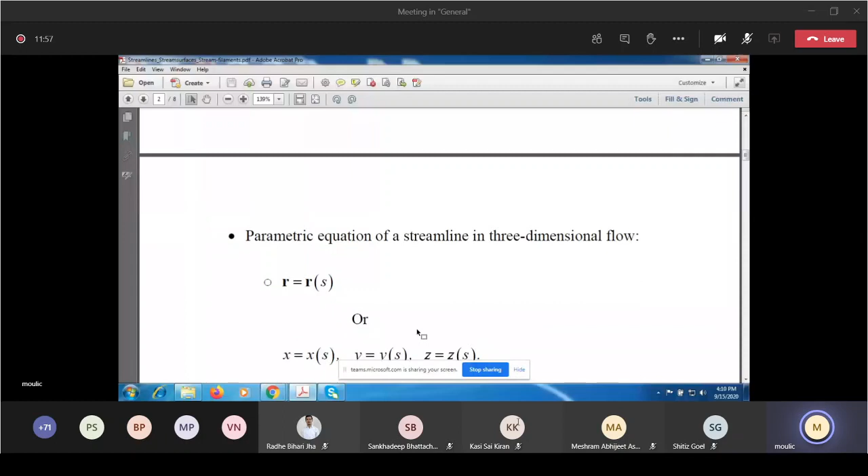Now, if you look at the parametric equation of the streamline for a 3-dimensional flow, the position vector r of a point on the streamline is a function of the arc length coordinate s. Equivalently, the x, y, and z coordinates are functions of this parameter s, the arc length. So the vector r denotes the position vector of a point on the streamline, and s is the arc length from some reference point along the same streamline.

So the vector form of the equation one can write as dr/ds equal to the velocity vector divided by its magnitude. If you divide the velocity vector by its magnitude, what you get is the unit vector in the direction of the velocity vector. And dr/ds is also a vector which is tangent to the curve defined by the equation r equal to r(s), and it has unit magnitude.

So if this arbitrary curve is a streamline, then you have dr/ds equal to v by v. This again is a vector equation which will have 3 components, which you can write as dx/ds equal to vx by v, dy/ds equal to vy by v, and dz/ds equal to vz by the magnitude of the velocity.

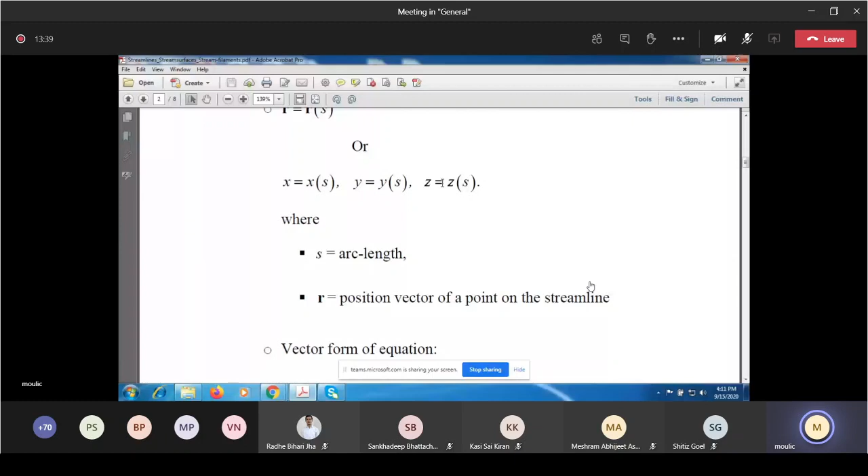So you have 3 scalar equations, which may be coupled equations, for the x, y, and z components of a point on the streamline. Now, in many cases, we will be dealing with 2-dimensional flows, so we will not be interested in the z component. So z is a constant in that case.

So here we will have just x and y being functions of s, and you have 2 equations: dx/ds equal to the x component of velocity by v, and dy/ds equal to the y component of velocity by the magnitude. Now if I take this second equation and divide it by the first equation, then the ds and the capital V will cancel out, and you simply get dy/dx equal to vy by vx.

So the slope of the curve in the xy plane, if the curve is a streamline, is equal to the ratio of the y component of velocity to the x component of velocity. These can be functions of x, y, and t for a 2-dimensional flow. If it's steady, the velocity components will not depend on time, but if it's unsteady, they will depend on time as well as the 2 spatial coordinates. So since the flow is 2-dimensional, there is no z dependency.

Now, let me ask you a question. We'll need this concept in this course. Can 2 streamlines in a flow field intersect at a point?

No, sir. No, sir. No, sir.

So what is the reason why? It can't have 2 different velocities at the same point. It cannot have 2 tangents at the same point. So if the velocity vector is non-zero, and if they intersect, then there will be 2 tangents, right?

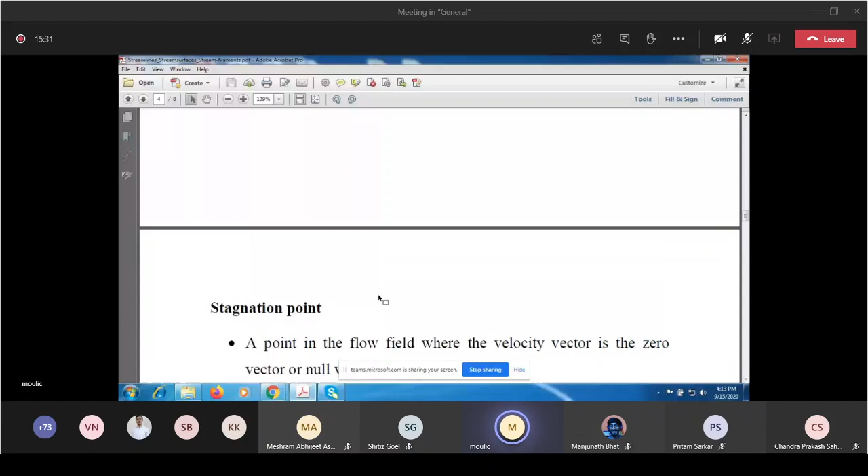But in your second year course, you must have come across this term stagnation point. Do you recall what is a stagnation point? A stagnation point is a point in the flow field where the velocity vector is the zero vector or the null vector. So it is a point where all components of the fluid velocity are zero.

Now suppose I have a stagnation point with coordinates x subscript s, y subscript s, and z subscript s. I'm putting this subscript s to denote the stagnation point. Then by definition, the velocity vector at this point will be zero for all instants of time. Of course, if the flow is steady, there will be no time dependence, but even if it's unsteady, at each instant of time, it will be zero.

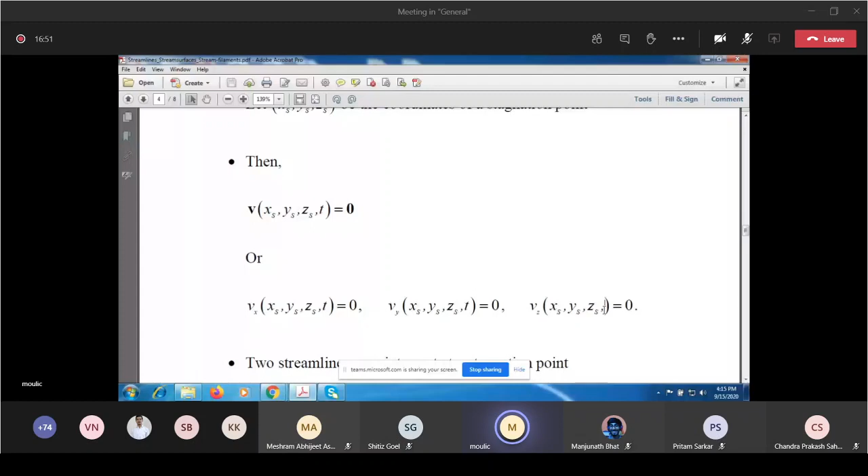So this again is a vector equation. It is equivalent to three scalar equations, that is, the x, y, and z components of the velocity at this point must be zero. And I have noticed a typo here, a typographical error. I missed the t somewhere. I'll iron out these small typographical errors before I upload it. There must be a t here also.

Now the question is, suppose Vx and Vy are zero. Then streamlines might intersect because the tangent is not defined. So consider a two-dimensional flow field: you have the velocity vector having two components, Vx and Vy, and the Vz component is identically zero.

As we have seen, the equation of the streamline is dy/dx equal to Vy by Vx. If you can solve this equation, you will get y as a function of x, which will be the equation of the streamline. Now, if both Vx and Vy are zero, then the right-hand side of this equation is of the form 0 by 0, so it is an indeterminate form.

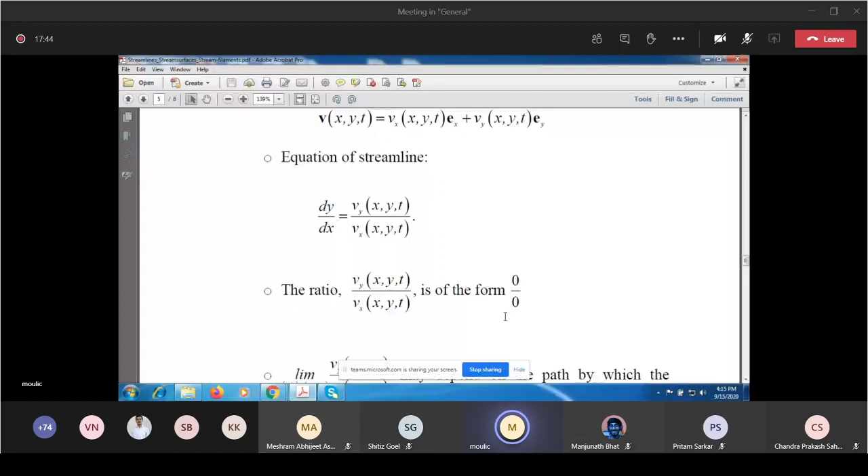So you can try to find the limit of Vy by Vx. To be more precise, Vy, which is a function of x, y, and t, divided by Vx, which is another function of x, y, and t, as x and y approach xs and ys.

But you can approach that point in the plane from different directions, and this limit might depend on the path by which the stagnation point is approached. So sometimes, in many cases, two values of this limit might exist. So how would you find these limits?

Well, you can expand Vx and Vy in a Taylor series expansion about xs, ys, or you can use the L'Hopital rule. And you may find that there are two finite values of the limit, depending on how you are approaching this point. So in that case, two streamlines may intersect at the stagnation point.

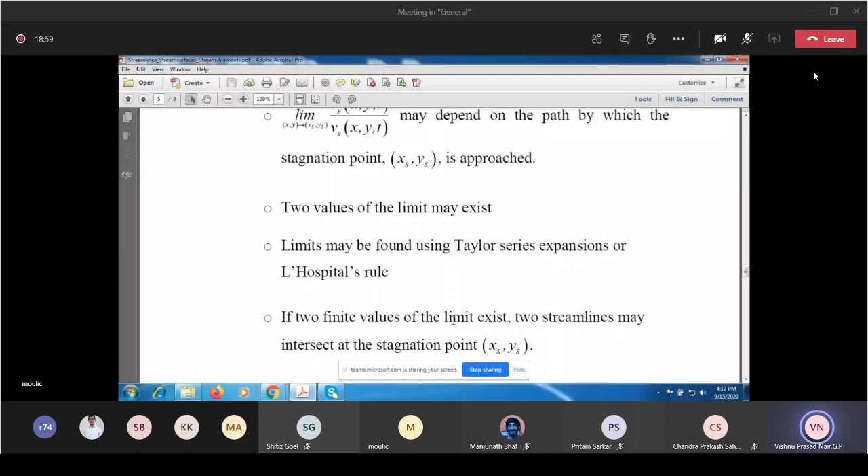Is it clear? Sir, but here, could we claim that the streamlines will end on that stagnation point? That is, they can't continue after that. After that, it would be some other streamline. So it would be like many streamlines coming to a point.

If two streamlines intersect at a point, then the velocity vector there must be zero. Otherwise, there will be two tangents. And if two streamlines are intersecting like at this stagnation point, those streamlines cannot extend beyond that, right?

Streamlines cannot intersect if the velocity is non-zero. Yeah, that is true. But suppose that we have a stagnation point and two streamlines are coming towards that stagnation point. Then my question is, can they extend beyond that stagnation point? Beyond that stagnation point, those streamlines are different, right?

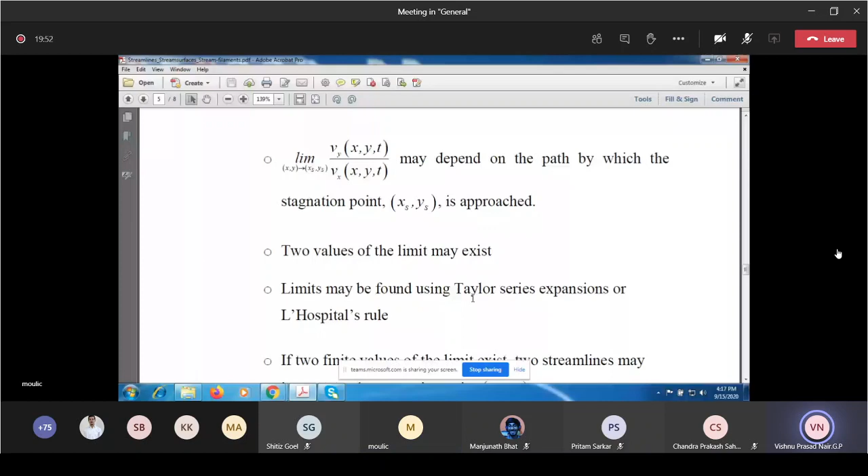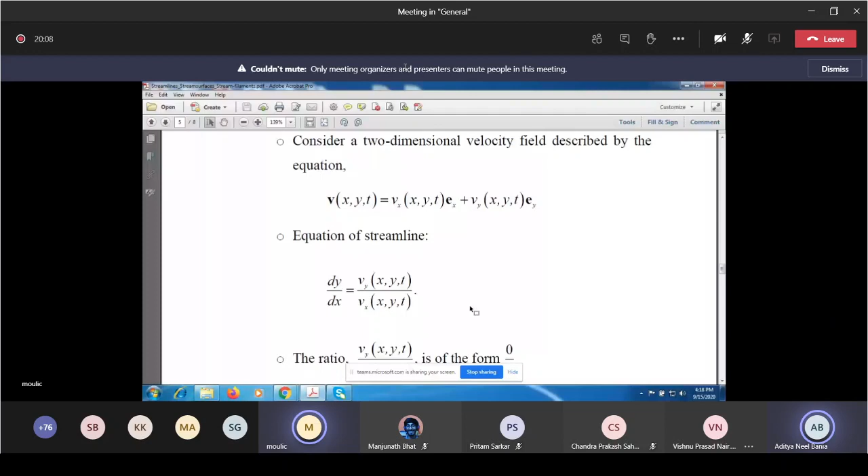So what I'm trying to say is, I asked you this question: can two streamlines intersect at a point? And the immediate answer was they cannot, because then there'll be two tangents. Right? Yes, sir.

Now, but the tangents are undefined if the velocity vector is zero. You can define a tangent to the velocity vector only if it is non-zero, that is, the magnitude is non-zero.

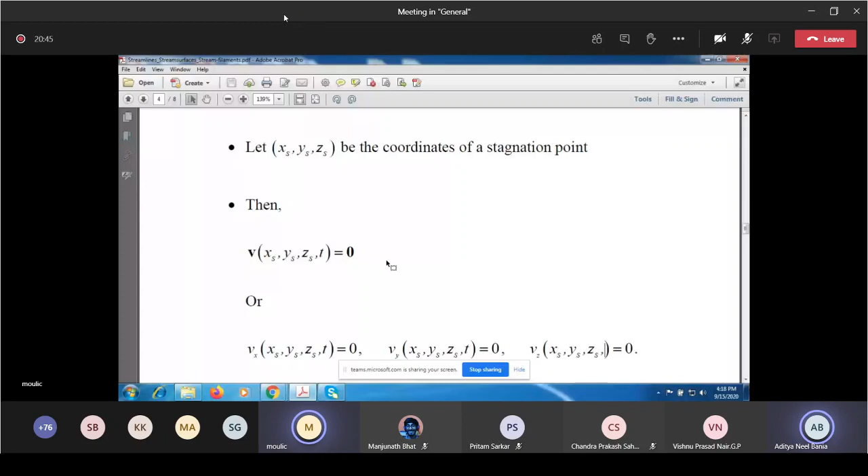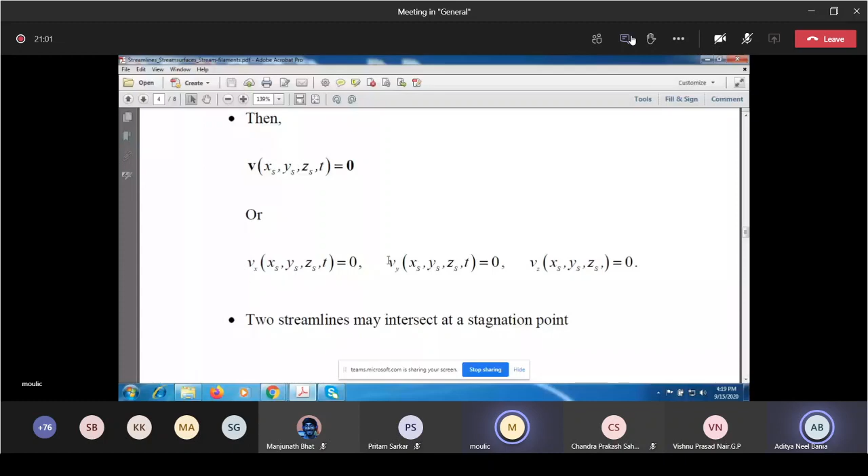So when the magnitude of the velocity is zero, of course not all points will be stagnation points. For example, if you look at viscous flow along a solid plate, you can argue that velocity is zero at all points. But streamlines are not intersecting. So those are not stagnation points.

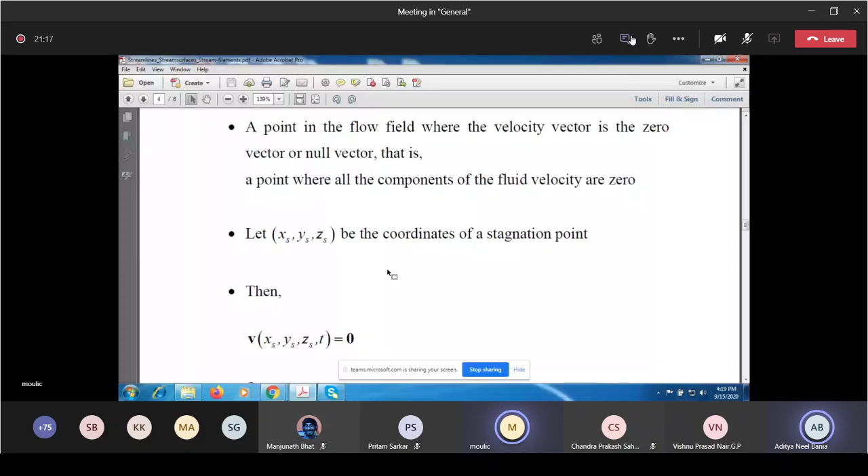So the concept of stagnation point is best understood in the context of inviscid flows. Imagine that the fluid is an ideal fluid. If it's an ideal fluid, it will slip along the wall, so then all components of velocity will not be zero over there. All components of velocity would be zero there, right? No, will not be zero. Correct. Only one component, say the Z component or something, will be zero.

Even if one component of velocity is not zero, you can define the tangent. In that case, two streamlines cannot intersect. So what I'm trying to say is, two streamlines, if they intersect, that is possible only if the velocity vector is zero.

Now, I can give you an analogy. You must have studied, done experiments on magnetism in the physics lab, either here in IIT or maybe in your school days. Have you drawn magnetic lines of force using a compass and a drawing sheet and a magnet? Yes, sir, all sir. So you know the concept of a neutral point in a magnetic field.

So the magnetic line of force is something similar to a streamline. It is a curve in space which is everywhere tangent to the magnetic force at that point. So you place a compass, a small compass with a small needle, and the north pole and south pole of the compass will align in a direction which is tangent to that curve.

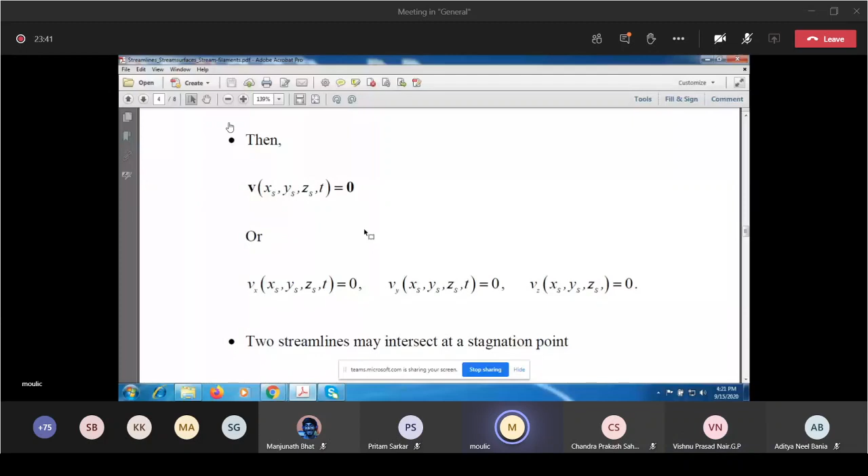But you could have points where the velocity components are zero, but it is not a stagnation point because there is no intersection of streamlines.

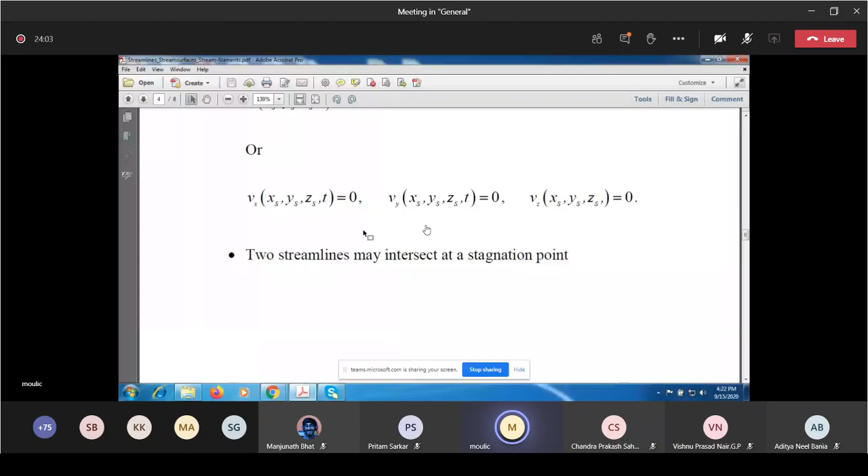So this is a very important concept, and in this course you'll find that we will not be solving partial differential equations. Unlike other courses on fluid mechanics, we'll be using simple models which are one-dimensional, but if you want to understand how those mathematical formulas are coming up, then these concepts become very important.

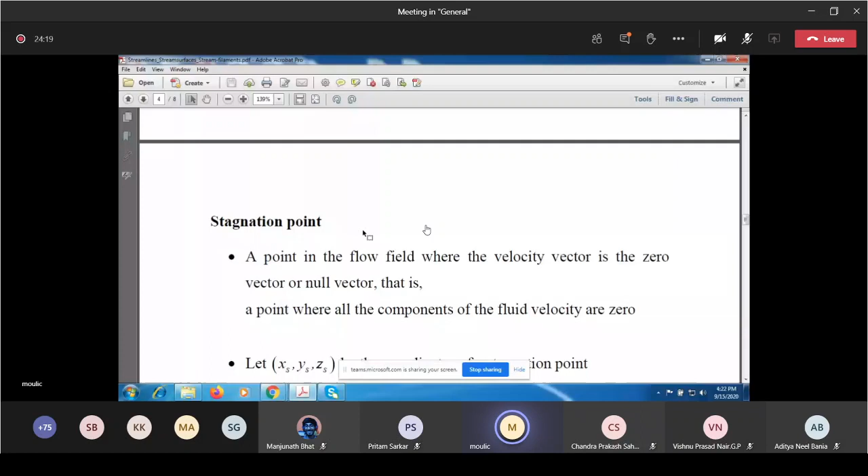So to identify a stagnation point, you have to see if streamlines are intersecting. And if it's an inviscid flow, if you look at the neighborhood of the stagnation point, where would the maximum pressure occur? What do you think?

If you apply Bernoulli's equation, that pressure plus kinetic energy - maximum pressure will be at the stagnation point, because the sum of pressure, kinetic energy, and potential energy is conserved. So if you are in the vicinity of a point, the change in potential energy is negligible. So the point where the kinetic energy is minimum will have maximum pressure because the sum is constant.

So a stagnation point will locally have the largest pressure. So if you're measuring pressures as an engineer at different points along a solid surface, if you find a point where the pressure is maximum, it's possible that another streamline must have come from another direction and hit that solid wall at that point.

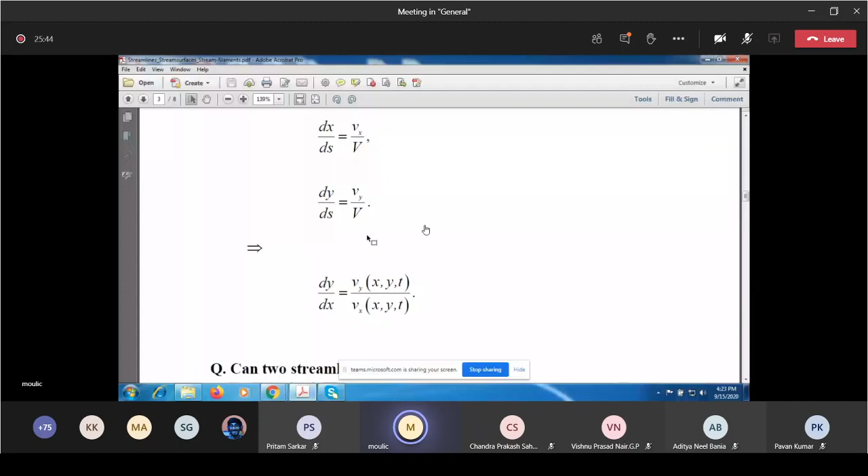So what I'm trying to say is that you can have two tangents, that means two values of the slope. If there are two tangents, dy/dx has two values, and that cannot happen if vx and vy are non-zero.

But if both vx and vy are 0, it is of the form 0 by 0. So of course, the limit might exist, so there may be a tangent, but the limit might be dependent on the path by which the stagnation point is approached. In which case, along two paths, you may have two tangents.

And in fact, you can show that if the flow is irrotational, the angle between the two directions is 90 degrees. But in viscous flow, it may not be 90 degrees.

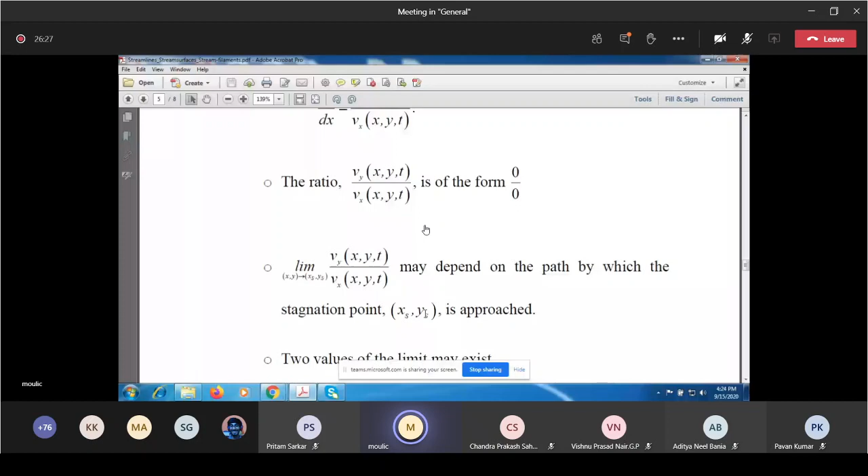Now let us look at steady flow versus unsteady flow. We'll be using Bernoulli's equation in this course, but as I said yesterday, Bernoulli's equation is valid only when the flow is steady.

But sometimes you may have a case where the flow is steady in a translating frame of reference, but unsteady in a stationary frame of reference. So you have to figure out whether the flow is steady or not before you apply Bernoulli's equation. Now, how would you do that?

Well, if you know the velocity field, you can see whether it varies with time. But another geometric way is to look at the streamline pattern.

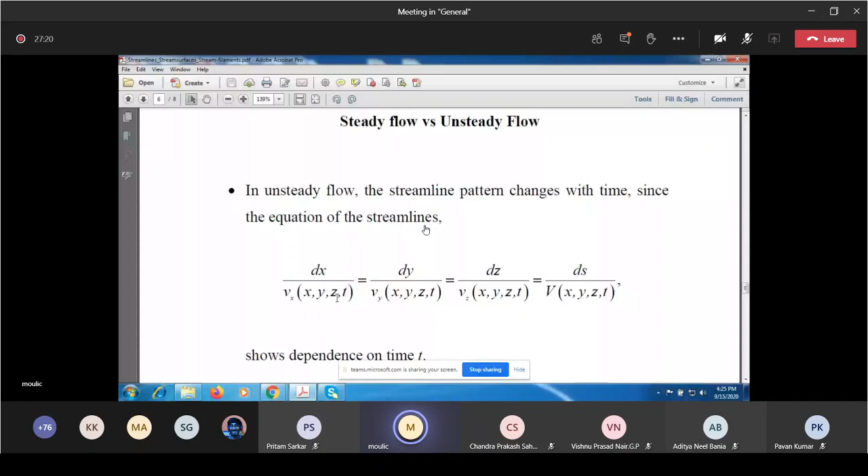Now, the equation of the streamline I've written down here again - I've written it in my first slide, but here I've written x, y, z, and t as functions. So as you can see, if the velocity components depend on time, then if you integrate this equation to find the equation of the streamline, it will have some time dependence. That means the streamline pattern will change with time if the flow is unsteady.

So you might do a flow visualization experiment in the lab, and you can take photographs of the streamline pattern at different instants of time. If you find that the pattern is changing with time, that means the flow is unsteady. So this is a physical way of figuring out whether the flow is unsteady.

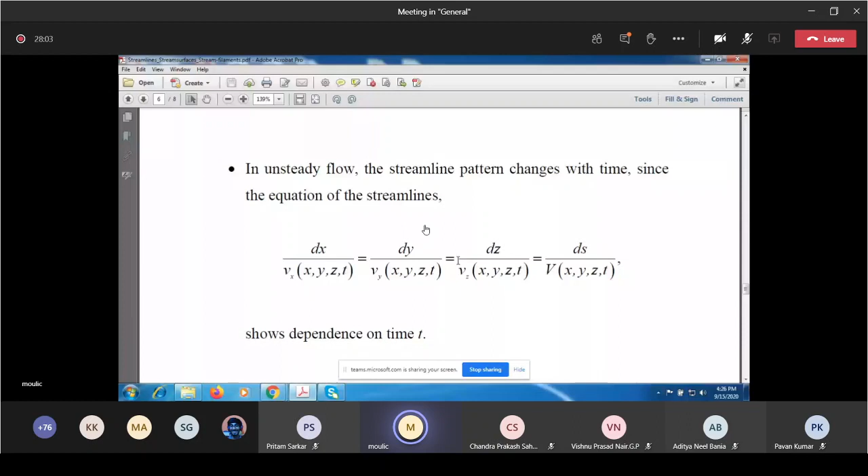Now suppose the flow is steady, then I'll write the same equation here, but I will not write the time dependence in the velocity components. Neither of the three velocity components depend on time, and therefore the magnitude v is also independent of time.

So if I integrate this equation, you'll get a curve which is fixed in space. There will be no time dependence, it will not move with time. So in steady flow, the streamline pattern is fixed in space. So these concepts you can use to figure out whether the flow is steady or unsteady.

So we'll come back later on to the Pelton turbine, and there you'll see that when the bucket is translating, with reference to the translating frame of reference, the streamline pattern will be fixed in space.

But if you have an observer on the ground, you'll see the streamline pattern moving or translating in space. So the observer on the ground will see a flow which is unsteady. But an observer attached to the translating frame will see a flow which is steady.

So we'll see that you can apply Bernoulli's equation in the translating frame, but that velocity which you use, v squared, has to be the relative velocity. So these are important concepts. That is why I'm reviewing all this.

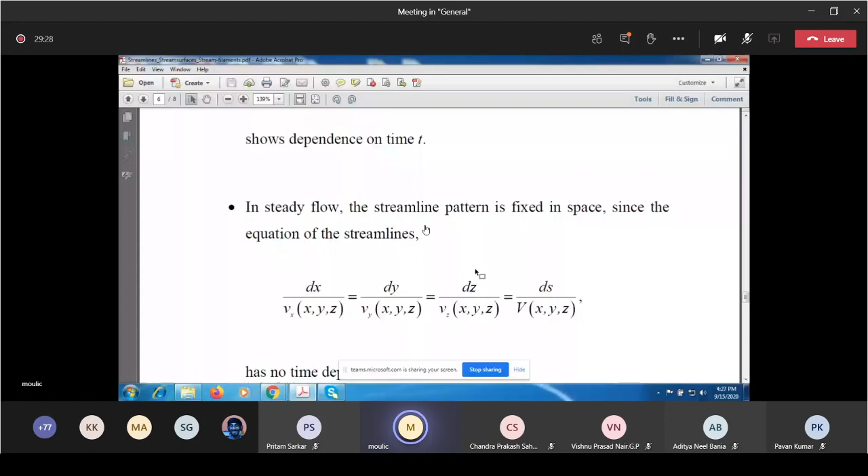Okay, now let us look at the term which is referred to as stream surface. This is a surface which consists of streamlines. Now, as you know, velocity vectors are tangent to the streamlines, so the component of velocity normal to a streamline is 0. So no fluid can cross a stream surface.

So if we look at the volume flow rate crossing any part of the stream surface, no matter where you are on the stream surface, the volume flow rate will be 0. If the surface is not a stream surface, you could have fluid crossing from one side to the other on some part, and in the opposite direction on other parts. So there may be a positive volume flow rate and a negative volume flow rate, and the net might be 0. But here, if it's a stream surface, you can take any portion of it and there'll be no fluid crossing it, so the volume flow rate will be 0.

Now, if you have an impermeable solid surface, you know that it is a stream surface. Why? Because if it's impermeable, the fluid cannot seep through.

Now, if you have a porous surface with small holes, fluid can cross the surface from one side to the other. You may also have a membrane which is permeable, which will allow the fluid to go through. In that case, the porous solid surface will not be a stream surface, and the permeable membrane will also not be a stream surface. But if you have a membrane which is impermeable, then no fluid can cross that membrane, and you can identify it as a stream surface.

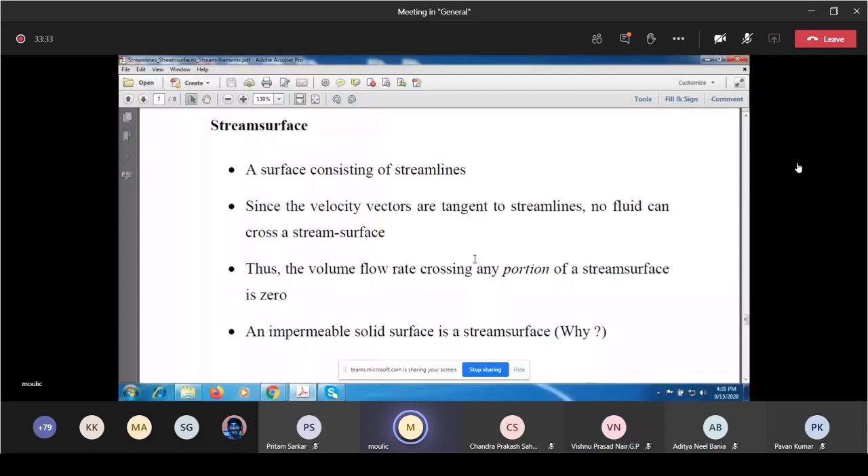Okay, now there's another term which you might have read before. It is called stream tube. This is nothing but a collection or bundle of neighboring streamlines which are passing through a small closed curve, and they form an imaginary passage or conduit through which fluid flows. And the cross-sectional area of this conduit may not be constant, so it may be kind of a wavy, undulating surface.

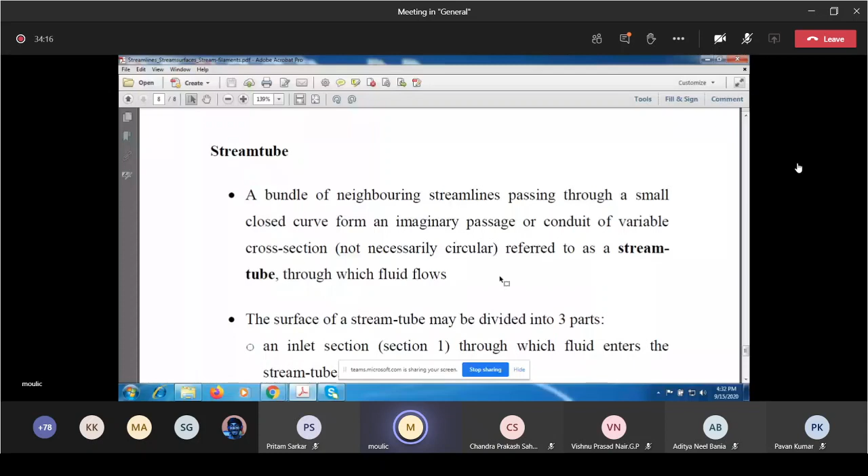So the surface of a stream tube will have 3 parts: an inlet section through which fluid will enter the stream tube, an outlet section through which fluid will leave the stream tube, and a curved lateral surface connecting the two ends.

So stream tubes, stream surfaces, stream lines, these are all imaginary lines. It's not a tube with a solid wall or anything like that. So imagine that you have a conduit through which fluid enters and fluid leaves. We are referring to the inlet section as section 1 and the outlet section as section 2. And the lateral surface is a stream surface, so no fluid will cross it.

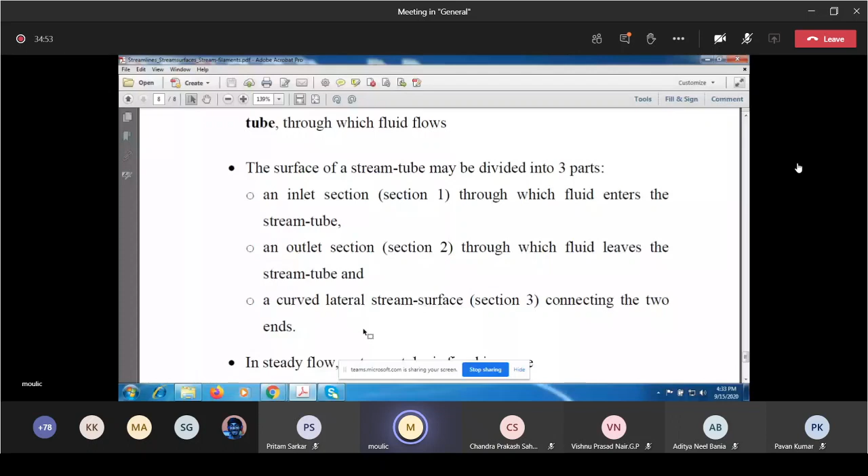Now, if the flow is steady, the stream tube will be fixed in space. And if the flow is unsteady, then the stream tube will move.

Now, are you able to hear me? Yes, sir. Yes, sir. There is a power cut here, so I thought there may be some problems. Okay.

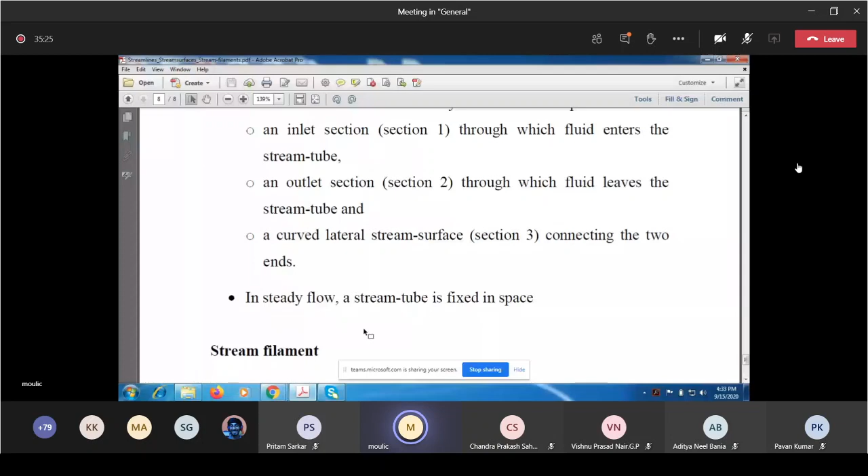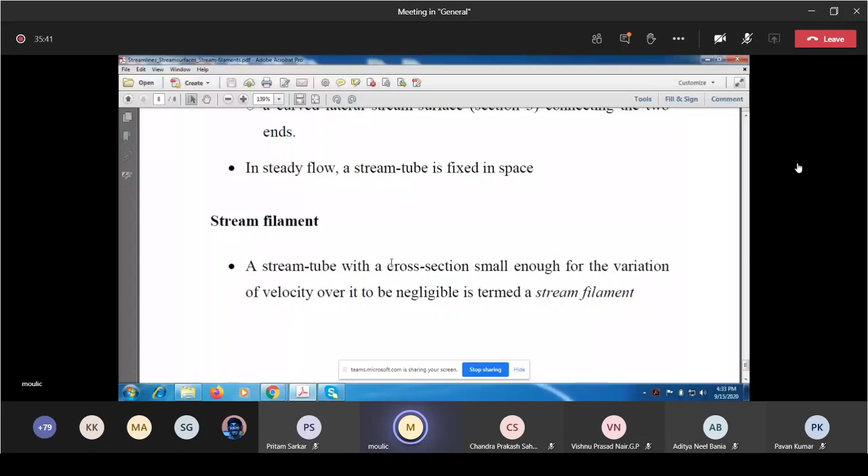Okay, all right, let us look at what is a stream filament. If you have a stream tube with a cross section which is very small, so small that you can neglect the variation of velocity over it, then you can call it a stream filament. So you can think of a stream filament as a stream tube with infinitesimally small cross section. It's a collection of streamlines.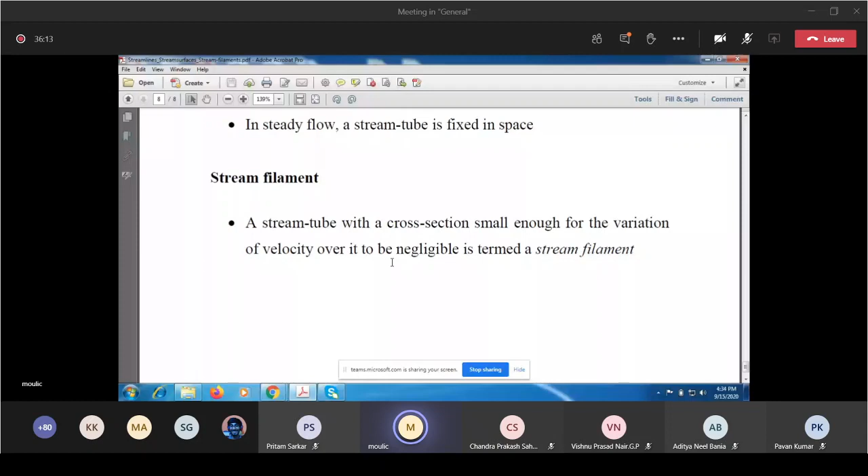Now I'll close this document and I'll go back to the first law of thermodynamics, which we discussed last time, and talk about it in the context of stream tubes and stream filaments.

Okay, so I've opened the document which I was discussing last time, and here we were applying global. Sir, you need to reshare the document. Oh, okay, okay, sorry. Thank you.

Okay, so let us look at what I was calling the global balance of total energy, or the first law of thermodynamics as applied to an open system or control volume.

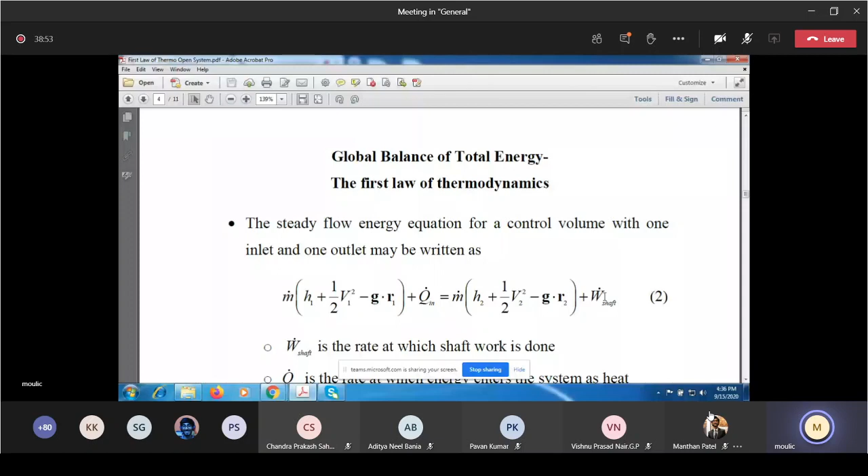Now we can apply this. You can take the control volume to be a stream tube. In that case, this Q dot in will be the heat transfer between the fluid which is inside the stream tube and the surrounding fluid which is outside the stream tube. So if Q dot in is positive, then heat will flow from the fluid surrounding the stream tube into the fluid which is inside the stream tube.

And if it's negative, then the energy in the form of heat will be flowing from the fluid which is inside the stream tube to the surrounding fluid.

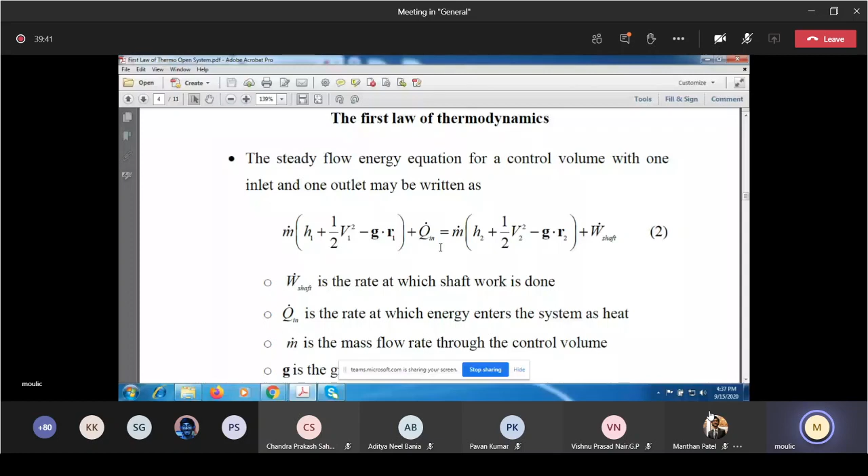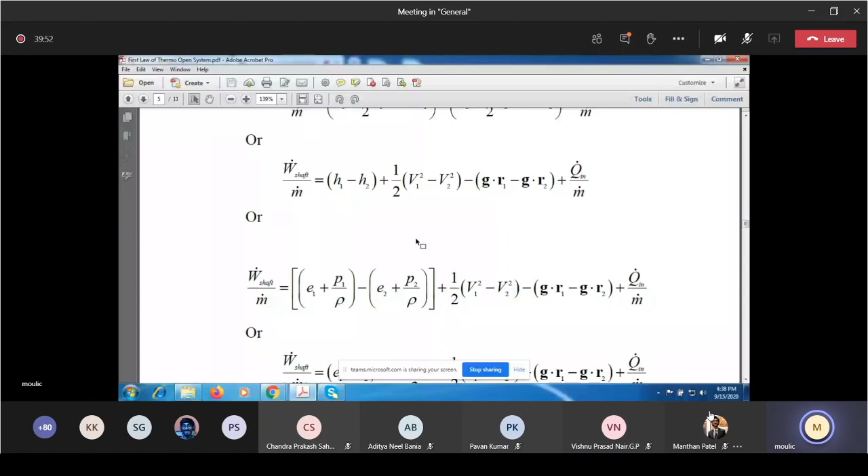Now this equation we rewrote in terms of the internal energy and the flow work PV. I'll just refresh your memory. We expressed it in the form where you had kept the shaft work per unit mass flow rate on the left hand side. So if you look at equation 3, the left hand side is the rate at which shaft work is done divided by the mass flow rate. And the right hand side had P1 minus P2 by rho.

So this is the contribution to the work because of the reduction in the pressure from inlet to outlet. And the second term is the contribution to the work due to the decrease in the kinetic energy of the fluid. So when the pressure and the kinetic energy of the fluid decrease, you extract work from the fluid. And if you're adding some work to it, then these terms will be negative, so the pressure might increase and the kinetic energy might increase. The third term is the change in the gravitational potential energy, that is usually negligible.

And you have this term over here, which is E1 minus E2 plus Q dot in by m dot. So what I'm trying to emphasize is, if 1 and 2 are the inlet and outlet of a stream tube, then this Q dot in here is the heat that is coming into the fluid inside the stream tube from the surrounding fluid. And if Q dot in is negative, then energy in the form of heat is being transferred from the fluid which is inside the stream tube to the surrounding fluid. It need not be a solid wall.

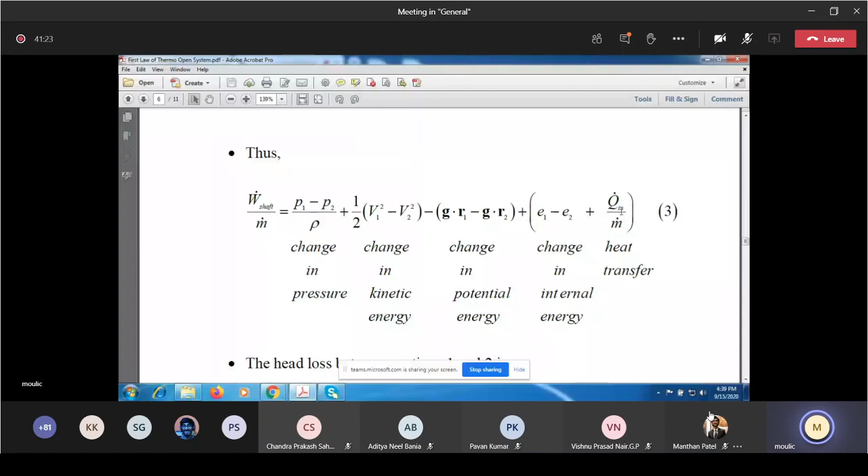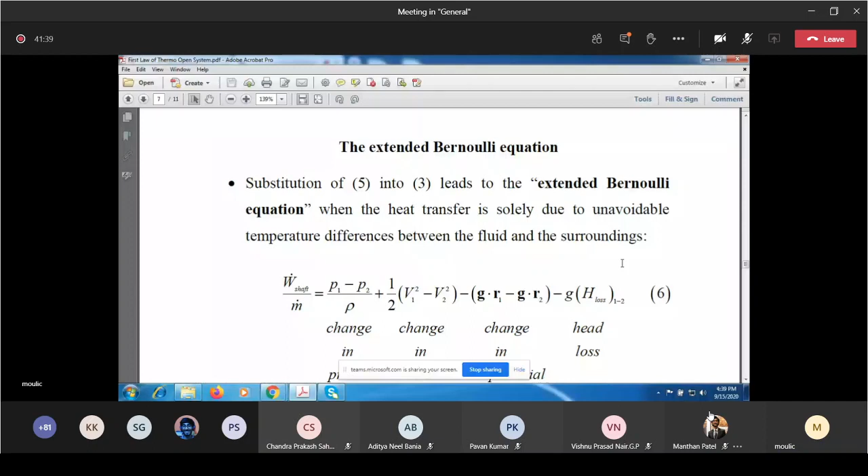So if you go down over here and look at this head loss term, we have defined it as 1 upon g times E2 minus E1 minus Q dot in by m dot. I want to emphasize that g is there just to get the terms on the right hand side in units of length, or meters if you're using SI units.

So you see that the head loss here is E2 minus E1, which is the increase in internal energy, specific internal energy, as the fluid moves from the inlet to the outlet. And minus Q dot in will represent the heat that is transferred from the fluid inside the filament to the fluid which is outside. So you can apply this to a stream tube or a stream filament.

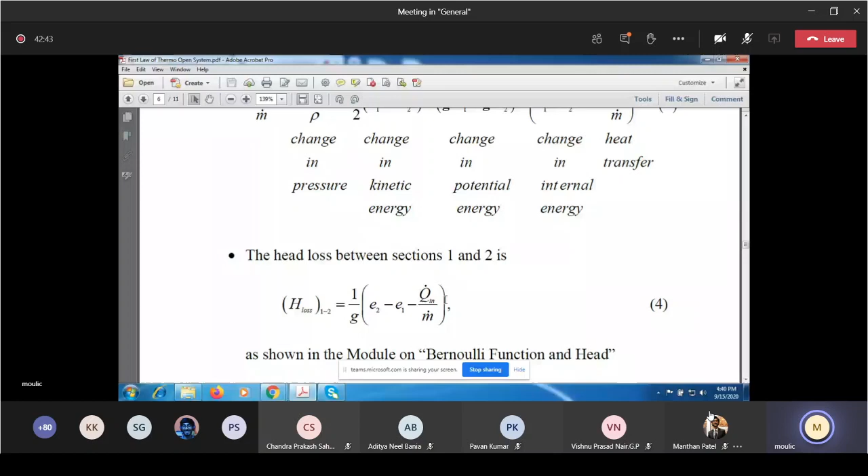So minus Q dot in is the heat which is flowing out, because plus Q dot in is the heat which is flowing in. And this heat transfer is from one part of the fluid to another part of the fluid. So by using the concept of streamline, stream tube, and stream filament, you can explain this energy conversion process.

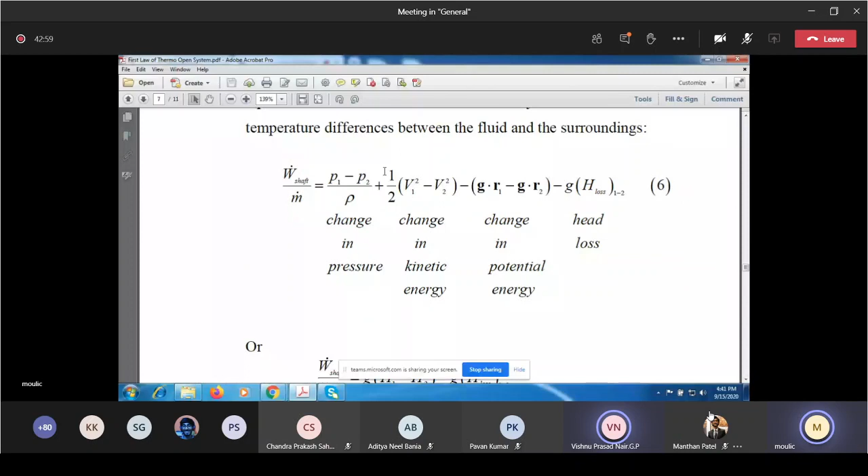Sir, I have a doubt. Stream surfaces can intersect, right? Yes. They could intersect along a common streamline, I guess. Yeah, it could. Suppose you have a flow field and there are two solid surfaces which are intersecting, then two stream surfaces are intersecting. That's possible.

What, like? Because a solid surface, if it's impermeable, if both are impermeable. Exactly, like a T-bend or something. Yes, but if you don't have solid surfaces, then only streamlines will intersect. Usually all the neighboring streamlines may not intersect. Streamlines can never intersect if you don't have solid surfaces. If you have a region of fluid with no solid surfaces, then only curves can intersect — tubes will not intersect.

So suppose you have a fluid which is at rest, then the velocity at each and every point is 0. You can't call them stagnation points — it's a static fluid. We are talking about special points in a flowing fluid. So in the flow field of a moving fluid, you may have certain points where the velocity vector is 0 and streamlines may be crossing.

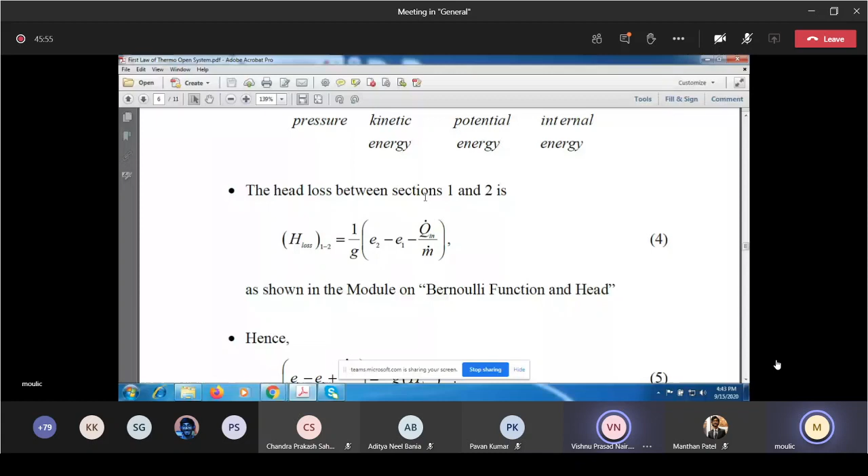So associated with that, there's one more doubt arising also. Streamlines intersect at the stagnation points, right? Then for an inviscid flow, the Bernoulli function should be the same along those streamlines, right? Yeah, but if you move from one streamline to the next, the Bernoulli function might change, if the flow is rotational, that is, the vorticity is non-zero, despite them intersecting at a stagnation point.

Oh, you're talking about a case where they're intersecting. Yeah, so then the Bernoulli function will be the same, because one point is common to them. If they're intersecting, then the Bernoulli function will have the same value on both the streamlines, provided the other conditions are satisfied - that is, the flow is steady, density is constant, and the force field is conservative.

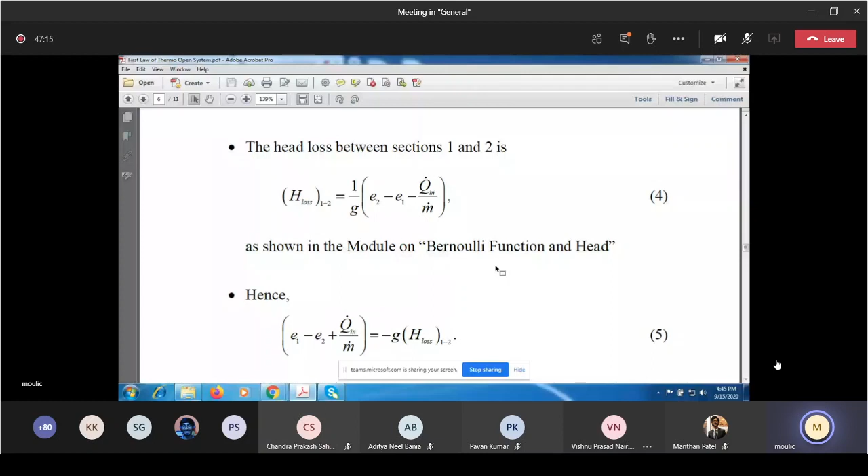Rotational or irrotational flow won't matter there, right? No, ah, yes. See, okay, let me go back over here. That is in another document, so I'll stop sharing this and open that one.

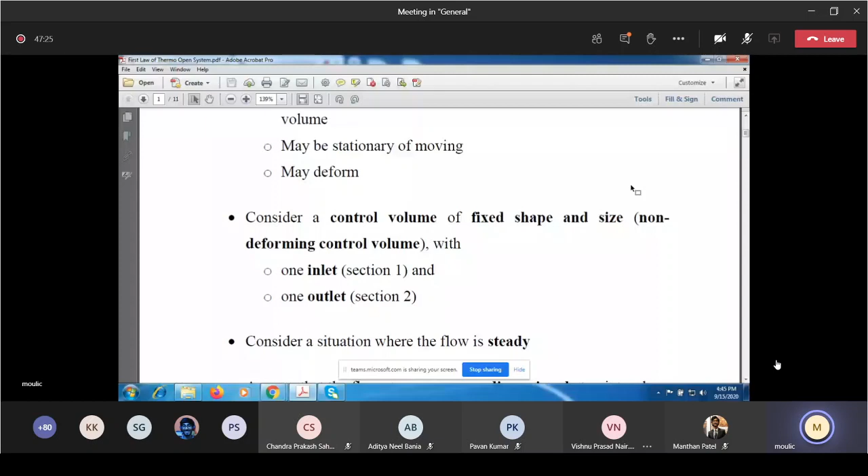Sir, before that, why do we consider the stagnation point? Because in theory, any particle cannot reach that stagnation point. No particle can go there, because before going there the velocity starts to go to zero. So we can neglect that and still be theoretically rigorous, right?

Can you say that again? It means no particle will be able to reach the stagnation point, as before going there the velocity will become zero, so it will reach there after an infinite amount of time. Right, so it is a singular point actually. Yes, sir. So we can neglect that point, and the particle which is at that point will not move at all.

Okay, so in your second year course, you might have solved problems where you found the path line of a particle. I've taught that course several times, and I used to give problems where I asked students to find the path line at a point where the velocity is zero. That's a degenerate case - there's no line, it is just a point. So the fluid particle which is at the stagnation point will not move at all.

The neighboring particles move very, very slowly as they approach the streamline toward the stagnation point - their velocity will keep on decreasing, so it will take infinite time to reach. That means it will never reach. So this is one of the problems with the continuum description of fluid flow.